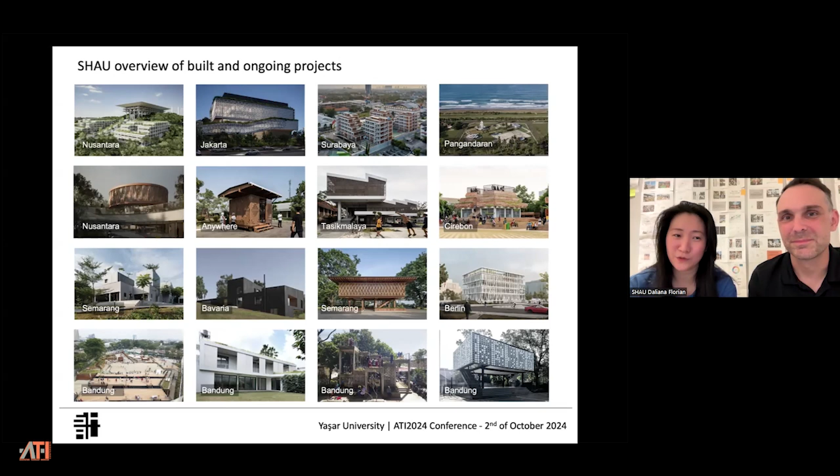This is an overview of our projects. So we do not specify ourselves in a certain typology or a certain program, but we are very wide range, from very small scale libraries to very big master plan projects, including a vice presidential palace at Nusantara, the new capital. So the project range is quite wide, and we are fortunate to have been recognized within certain global as well as regional awards, where we try to see where we are in our design at the moment.

So when we're introducing ourselves, we used to use a normal world map with a Mercator projection. But at a certain moment, we realized it's not representing our world and the world we're operating in very well, because it's very much focused on the global north. So we switched over to the Dymaxion world map by Buckminster Fuller. It's based on an icosahedron. And what we like about it is it projects the continents in different parts of the world more equally, as they are in relationship to each other in size.

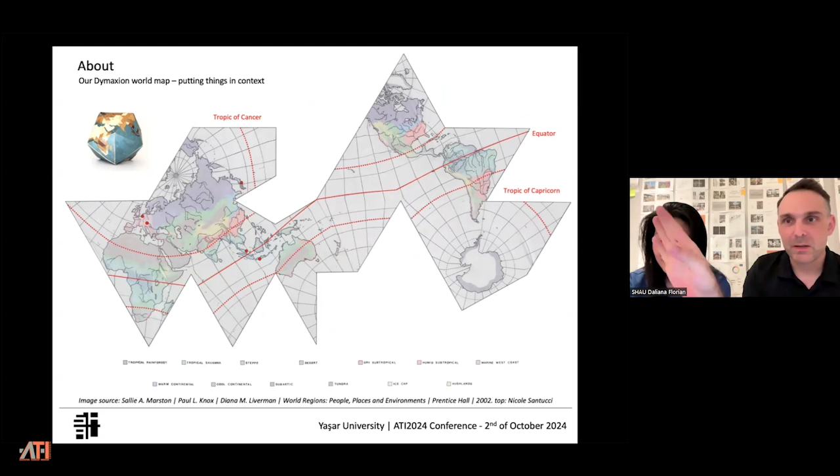But by cutting this open and unfolding it, you can create your own context, and that's exactly what we did here. So our anchor is Indonesia and Singapore. So we made a little bit more of an Asian-centric unfolding. We put the Americas far away because we're not operating there; they're not so important for us. And at the same time, we put a climatic map as a background.

Because also this unfolding where you see the equator as something continuous, this is something that we can learn from around the world. Coming into Indonesia, especially for me, maybe not so much for Daliana, was also a process of unlearning and relearning, especially with this semi-formal context. From Europe, you do your contracts, you do your drawings, you send in your BIM model, everything should be clear, ideally speaking. But in an Indonesian context, it's much more informal. It's much more of a negotiation process. A plan is not necessarily something set in stone, but something which you also need to negotiate and need to be flexible during the construction process.

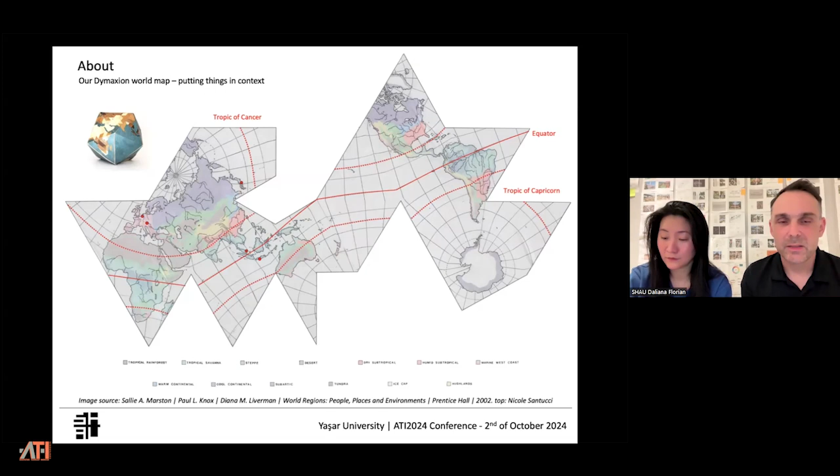So in that sense, if we look at the equatorial regions, I think we as architects can learn a lot from other tropical climates and solutions and implement that in Indonesia. So we want to look at architecture a little bit from a different side, not necessarily from a global north perspective. And this is what is expressed by this map.

And the interesting part is that in comparison to the global north, you have a much more narrow spectrum of temperature. So you don't have to deal with cold winters, and you don't have to deal with hot summers. You don't have to deal with these extremes, which means you can generate relatively open buildings that don't need to be that airtight in order to be comfortable.

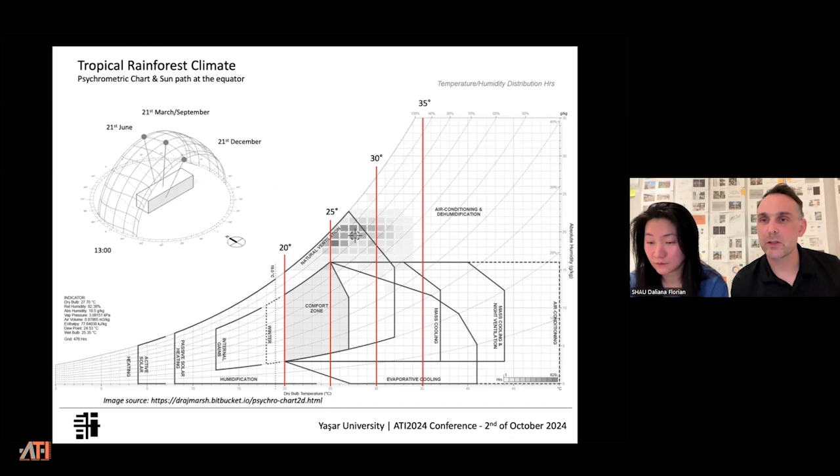So this heavily influences, of course, the building geometry and orientation in the layout. So you strive for relatively slender volumes where you can have a lot of cross ventilation, with the long facades towards north and south for easy shading.

Now, looking into energy consumption per capita, the United States is by far the most consuming country, but India, Indonesia, Brazil, and other countries which grow economically will also have a huge energy demand. So our idea is that we do not deny anyone air conditioning, but we try to get into a position where building envelope performance can curb these peaks, or in general contribute to a lower demand for operational energy. And this is what all our architecture is trying to do.

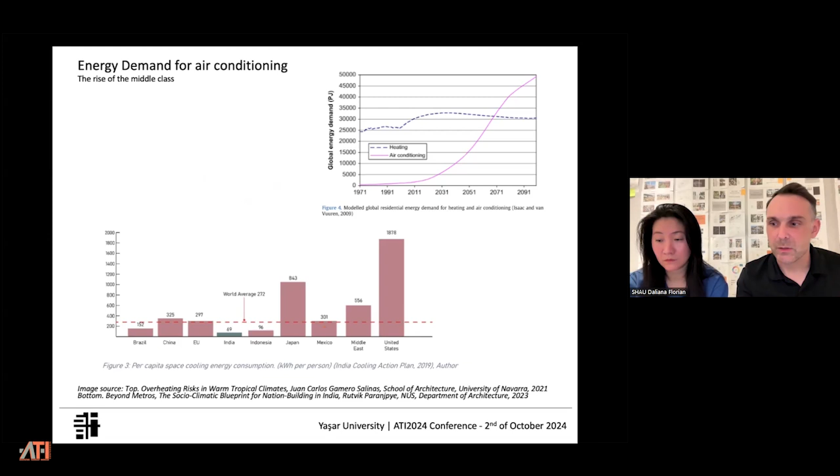And in opposition to, let's say, a hot, arid desert climate, you don't want to work with thermal mass, because with the clouds throughout the night and the day, there's very little opportunity to discharge thermal mass and radiate it into the night sky. There's also not much temperature difference between night and day. You have like 30 degrees all year. So a breathable, permeable architecture in terms of cross ventilation and breeze is what you actually find in most of these regions.

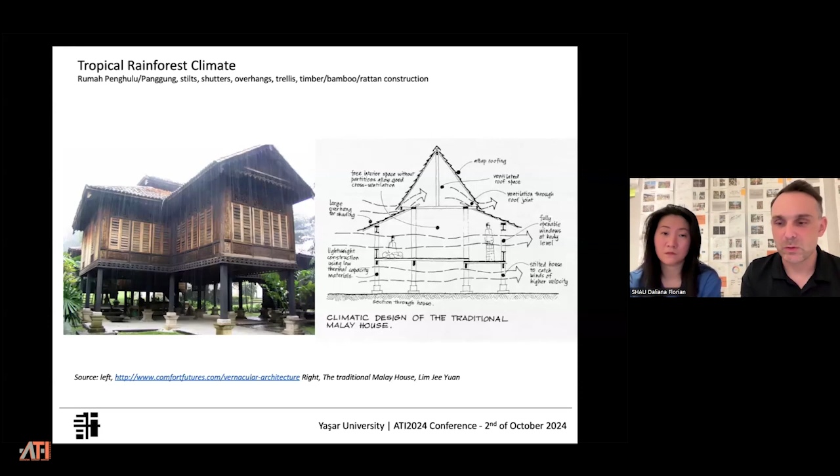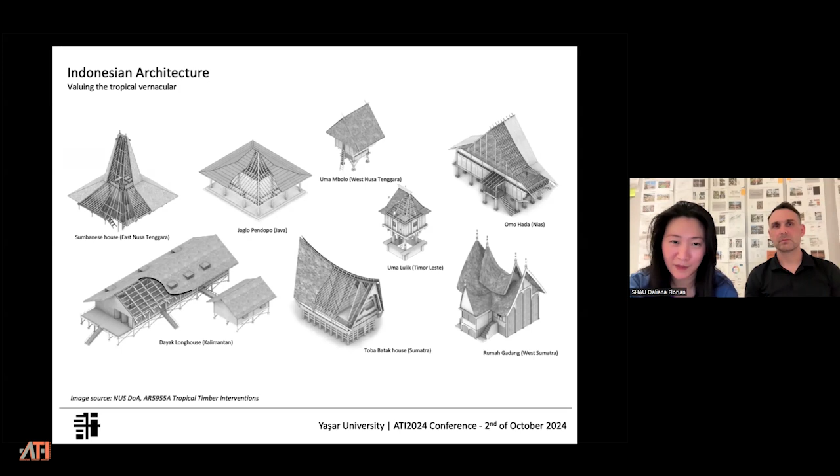So these are drawings made by the students of Florian at the NUS, and we take a lot of reference from the traditional architecture because it has been there for so many hundreds of years, and it is considered very valuable to see what has been done natively by the people.

But as well as it creates socio-climatic spaces, which is where culture and programmatic uses are embedded into the architecture in such a way that they are not separable from each other. And it is important, we think, to see architecture in that way, that it is never separated from the people, from the users, from the culture.

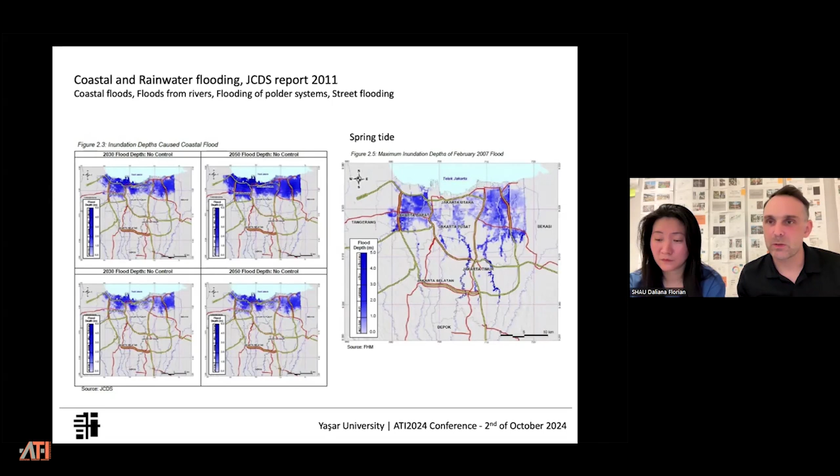So one does not know where to start and where to end, which also led to a decision by the Indonesian government under Jokowi. There were plans over several years to move out the capital, and now they're finally making it happen.

So there will be a new capital in Kalimantan. That's how it's called in Indonesian. Internationally, people maybe also know it as Borneo. It's an island slightly northeast of Java. So the idea behind it is to relocate the capital into a sort of more disaster-secure zone, so there are very few earthquakes. And of course, bringing the capital more central into the country, so that other, let's say, more disconnected parts of Indonesia have sort of equal access.

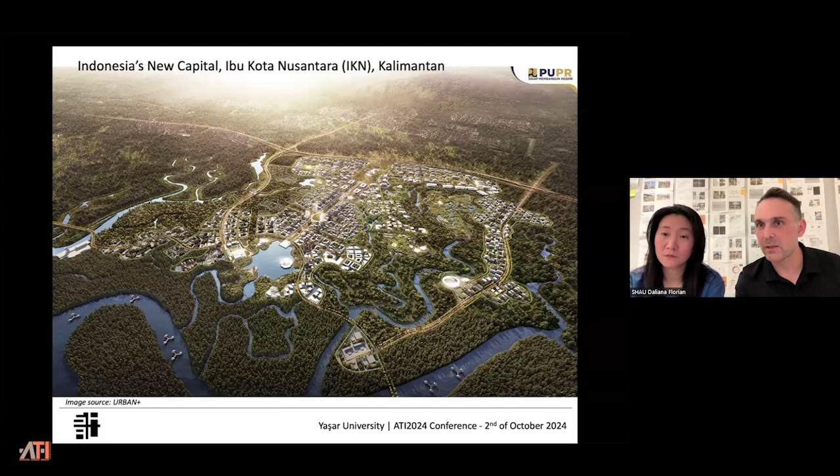We will also talk a little bit about the project there, but this is sort of, very in a nutshell, what Indonesia is about, architecturally speaking, from our point of view. And with that, Daliana will now explain projects from us.

Let me take you from the last slide of Florian, the new capital, to Bandung. So Bandung is the place where we grew as an office and where a lot of our earlier projects are taking place, including this very first micro-library in Bandung. It's called Micro-Library Bima. So we have support from the city of Bandung, as well as the Muslim foundation called Pocket for the Poor. And it is situated on a 500-square-meter plaza where there is an existing stage, and we elevate the volume, clad it with 2,000 ice cream buckets to allow the multi-programmatic activities underneath in the outdoor space.

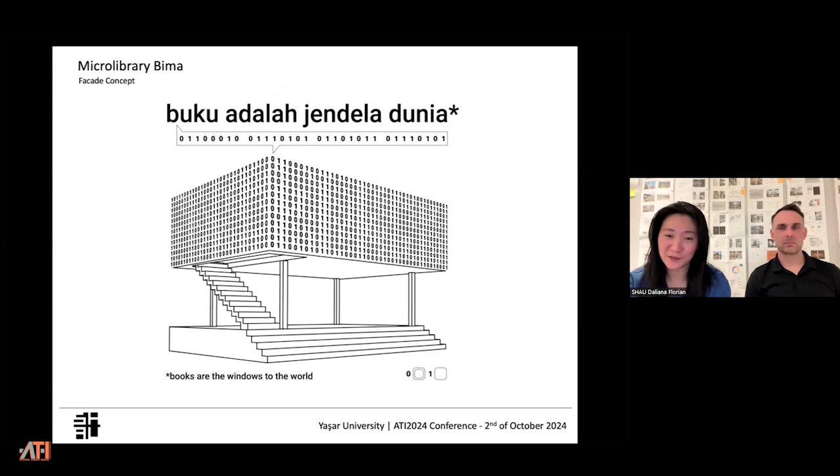So in a way, this is already a semi-informal project engaging different stakeholders, such as public authorities, but also foundations, as well as the communities. So for each of the buckets, one is closed, one is open, and we made some coding, 0 and 1. And with this binary code, if you read it out loud, it's a repeating sentence that says books are the windows to the world, which happens to be the message from the mayor of Bandung, who is also an architect, by the way. So this is a very interesting way to put a message on a facade which looks random, but actually it's not.

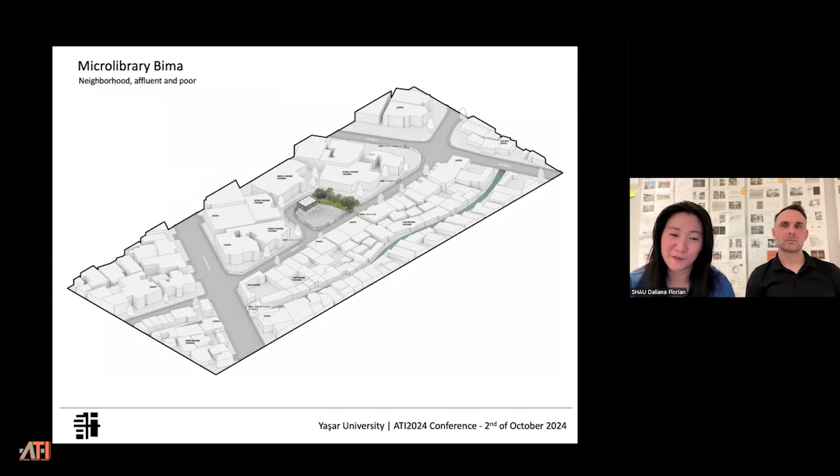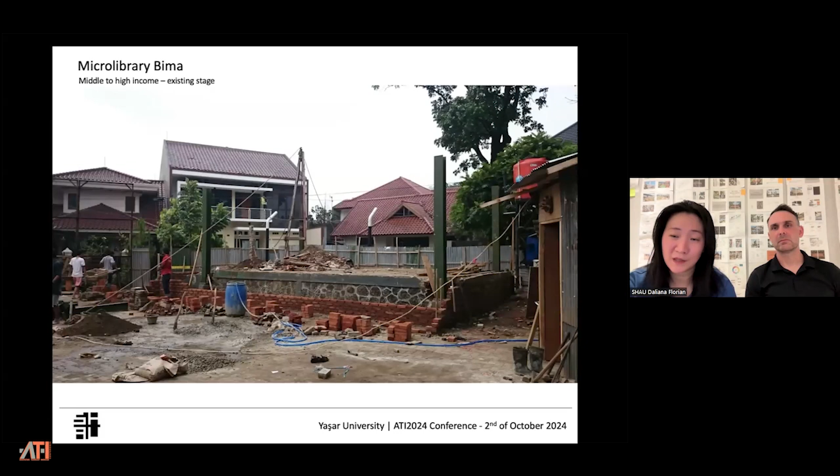The context is very interesting as well. The plaza is surrounded by several middle-class housing, but mostly lower income housing, which is built along the river. So it looks like this. The river is seen as the backside of the house, and these are where our users are from, the lower income kids. There was an existing stage, and we decided, instead of taking away the stage which they're already using, keeping the stage, extend it, and then put a volume on top of it.

And we were considering a lot of different materials for the facade in the beginning. So we were searching around what kind of secondhand material is available. And in the beginning, we found jerry cans. So these are like plastic jerry cans where you put water or oil to sell it to the people. But at that moment, we could not have enough used jerry cans, and we were offered that they would produce new plastic jerry cans for us. So we said no, because that's defying the purpose of using reused materials.

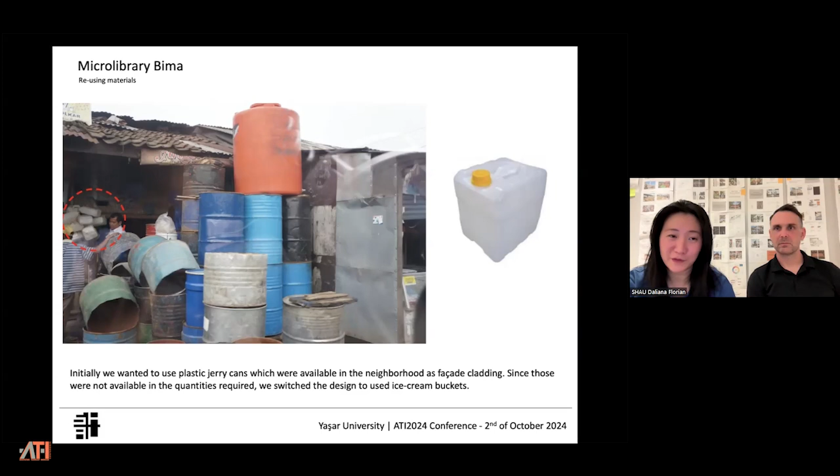And so luckily, after searching hard over and over again, we found another material which is even better in this regard due to its size and availability: the ice cream buckets. So there are many weddings in Indonesia, and every time there is a wedding, there is ice cream. And this is exactly the ice cream buckets used in the weddings, and every wedding uses 5 or 6 buckets. And then over time, there is a secondhand market that collects them. And all we had to do was to contact many of these online sellers. And then after 2 months, we managed to collect 2,000 ice cream buckets.

So we clean them, we punch holes in some of them. And it is also interesting because we are in Indonesia, where everything is done manually. So even though we have a clean file, we cannot just send the file to the printing machine and then it will be done by robots, which we would have done if we were, say, in Switzerland. But in Indonesia, there is a lot of manual labor, and even the tool for punching the holes for the screws is also made manually. So this is where, say, the file to craft happens. And we value this process very much.

How do we, as architects, have to communicate and be creative about how to go from our 3D file to the implementation on site? So this is some photo of the assembly. It's a structural frame. And then this is where part of the ice cream buckets are being installed.

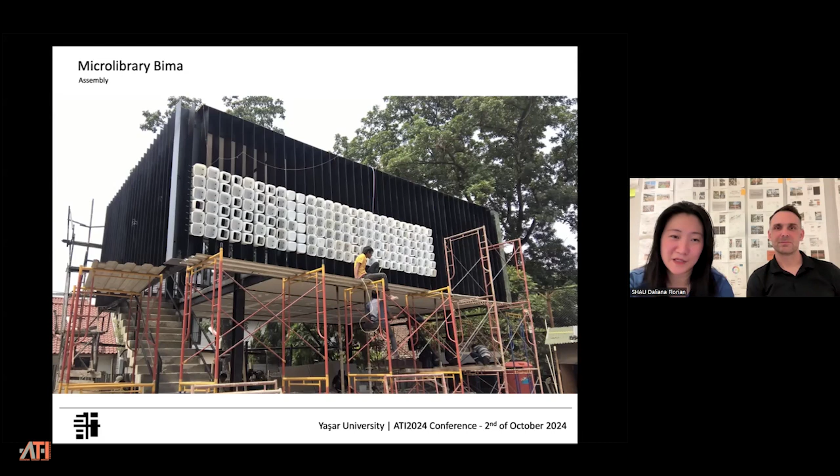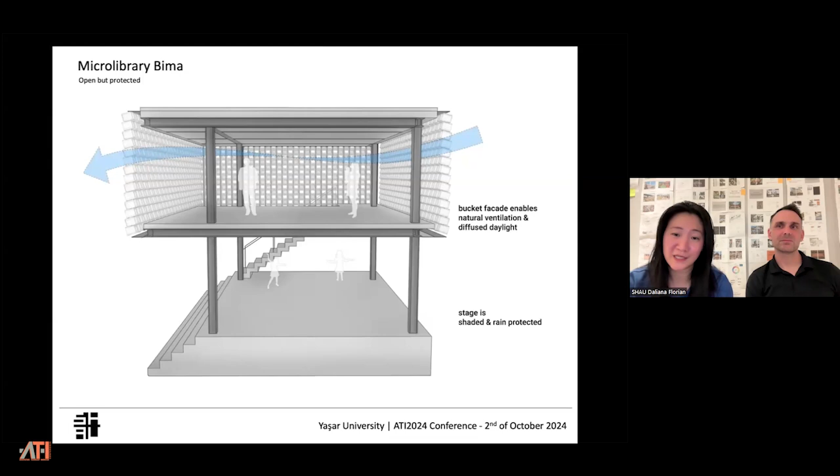So for us, engaging the stakeholder, making a mechanism, if you like, how to deal with the communications, the negotiations, so that things can work in place. So the communication design is also important, not only the architecture design.

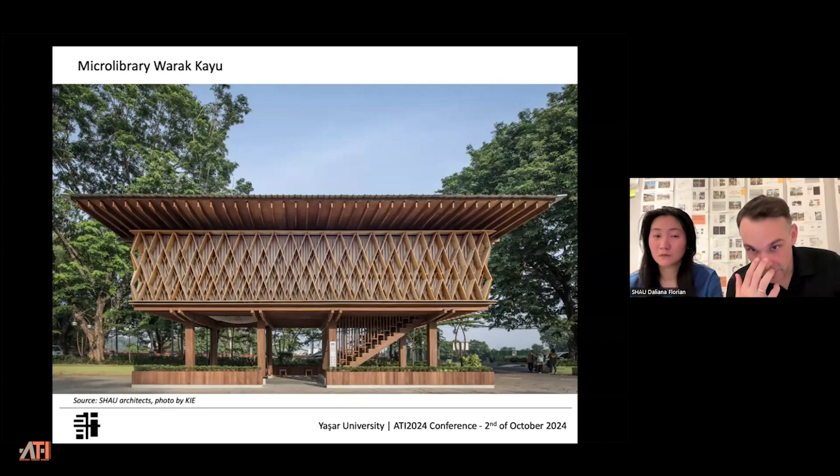It's also made entirely out of timber, mass engineered timber in the form of finger joint laminate and plywood. And it's the first completely FSC, Forest Stewardship Council certified building in Indonesia itself. So the timber is logged in Kalimantan and then shipped to Semarang, but they have a reforestation program and so on to grow new forests out of the logging they harvest.

It is situated next to a major road and a food court. So it doesn't need any toilet because the food court has a toilet. It doesn't need anything else because people can grab food there. And the difference to the previous library, Bima, is that it is more at a traffic artery. So it is serving a wider audience, or has a wider catchment area than the previous one, which is only for a very small neighborhood.

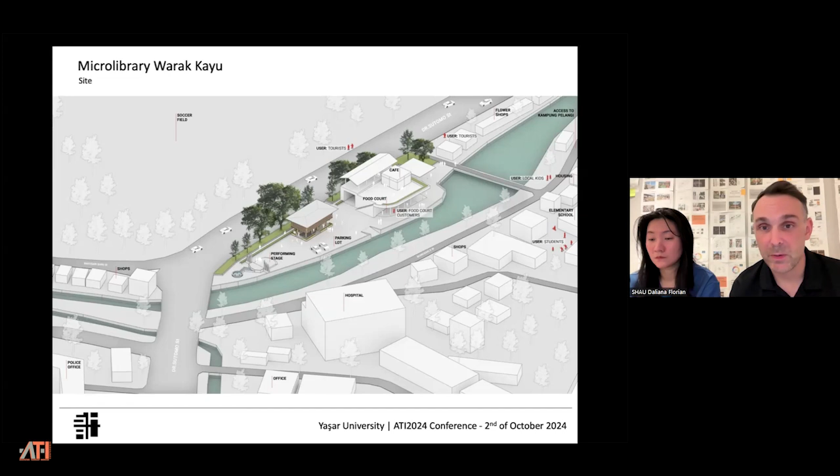Here you see a little bit towards the Kampung Pelangi. So Kampung again, the village, and Pelangi means rainbow. You see this signage up there on the hill. So there's a lot of upcoming middle class people working and living there. There's a school nearby. So it's quite an interesting setting to get people attracted towards reading and bring them into a library.

Because it would be actually quite interesting, instead of having a material mix of concrete, steel with wood or whatever, could we make this library entirely from timber? So we visited the factory and had a look into their capabilities in terms of manufacturing, as well as material availability and material strength. And from that, we started a bottom-up design process. In that sense, what can we do?

And part of that, again, in terms of climatic performance, is the envelope, the brise soleil, which in a way, together with the roof, shades the interior and reflects the light diffusely on the inside. And we found this also quite interesting because we based this on a construction method which is called the Zollinger

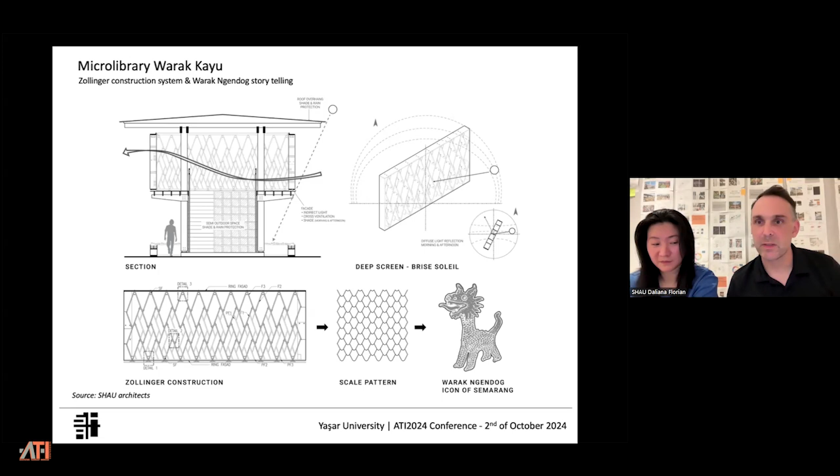But instead of designing it from that side towards an expression of the building, it is really an outcome of the design process, and then coming up with this idea also as a communication device. Because what is very important in this formal, semi-informal context in Indonesia is how you communicate a project so that people can accept it and will like it. With the ice cream bucket, it was relatively easy because everybody loves ice cream buckets. But with this one, we made a story work for us, for our sake as well.

Part of this construction is then the building of this one-to-one mock-up. And this was super instrumental and very important, because only sending files and drawings there is not enough. It was also a great chance for the workers at the factory to learn something. So we could go back and forth. We could test out details. We had a very interesting ping-ponging design process with their engineering team. We could look at, does this detail work? Does the material quality work? And so on and so forth.

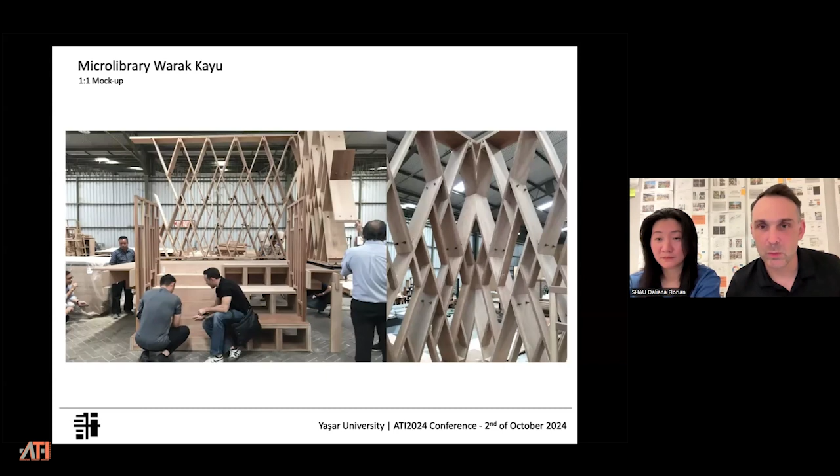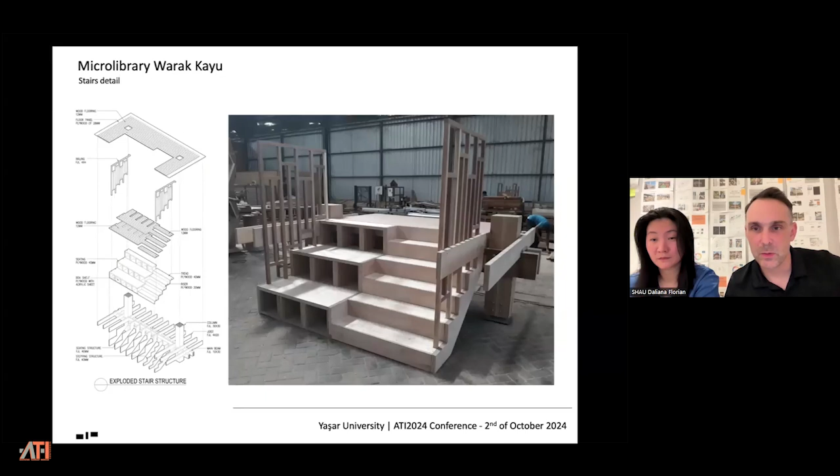So the workers in the factory used it for their training. But later on, the contractor, who had never assembled something in timber, could also come and look into this one-to-one model and check out how these details are working. And here you see how this mock-up, which you saw previously in its entirety, was built up. We wanted to test the stair with the seating stairs. How does the flooring connect? How does this handrail, or this trellis, which is lockable later, connect? So checking all these details.

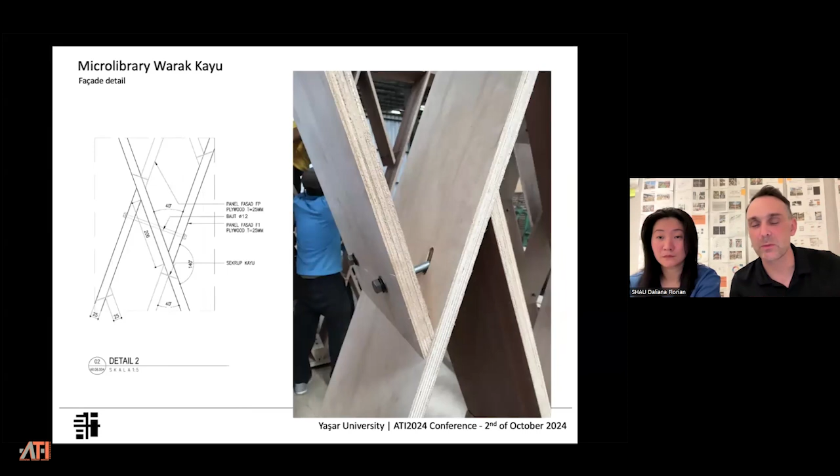Then here you see a zoom-in of this Zollinger construction. This one board is cut at an angle so that it perfectly hits the required angle so the bolts can go through perpendicular. How does it work with the round holes and the long holes in the middle, as well as this corner detail, which was very intricate. We have two different corner details on each opposing side, and how that can work and be manufactured.

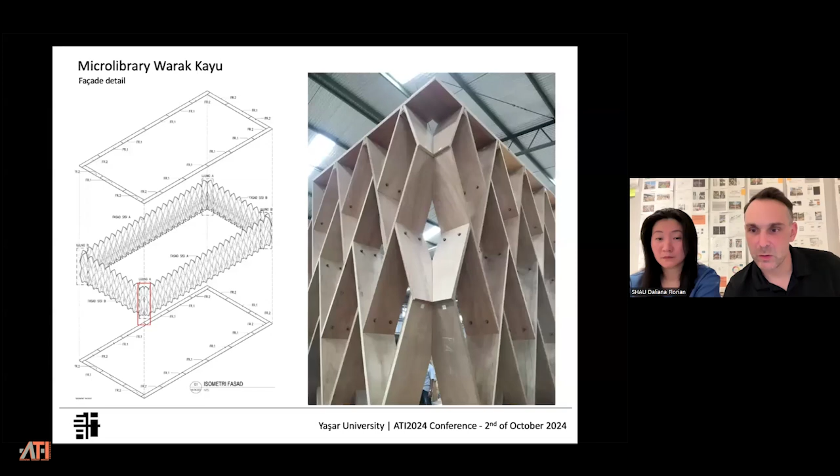And then finally, you see here again the detail of the facade, how it comes together on the floorboard. Basically, it's working with a wedge which is pressing these boards apart, and they're sitting in a groove. And since they're sitting in a groove, they cannot move. So it's like a friction joint in that sense. So this was a very interesting design and communication process to do something which had never been done before, even though at a small scale.

And as Daliana also mentioned earlier, in this process communication is the issue. So working with one-to-one mock-ups and directly with the material is crucial, because sometimes this high level of abstraction from only a 3D file or an elevation is not giving the best results in terms of architectural outcome.

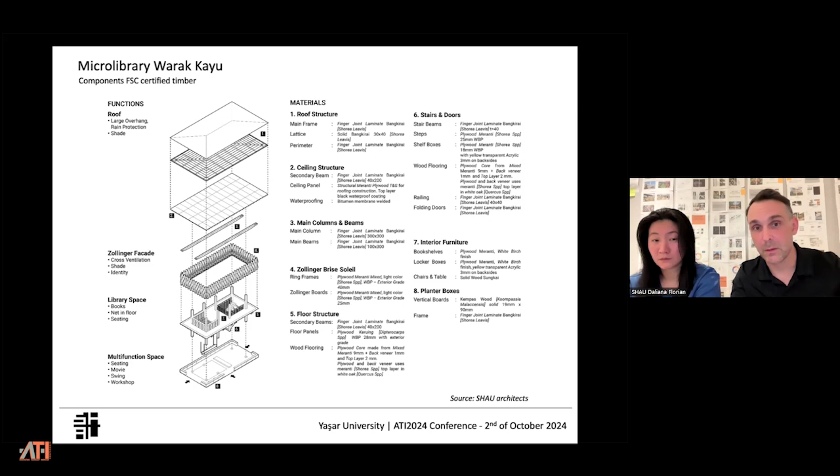But also in implementation of play features. So what we learned from this Bima and the earliest microlibrary is, in order to attract kids, and this is of course the most important target group, is to bring them there. And in microlibrary Bima, kids from the neighborhood were always playing football, so they were there, right? So we didn't want to place the library on the ground, because we would take away the reason why people were there in the first place. But here, something like that was not existing.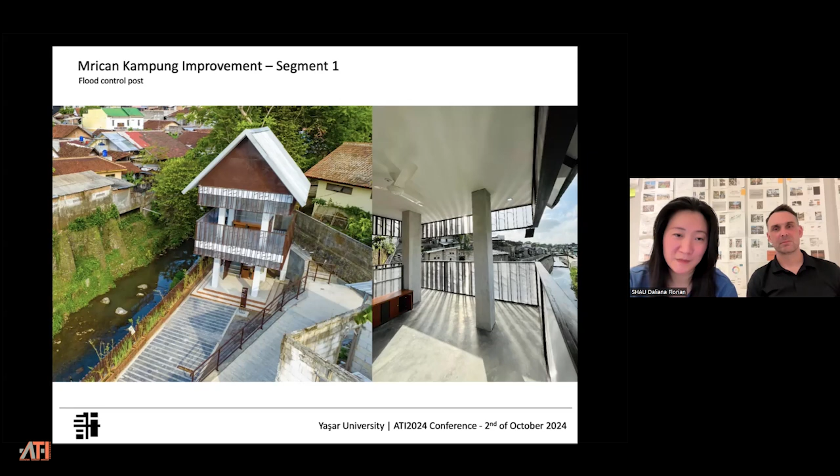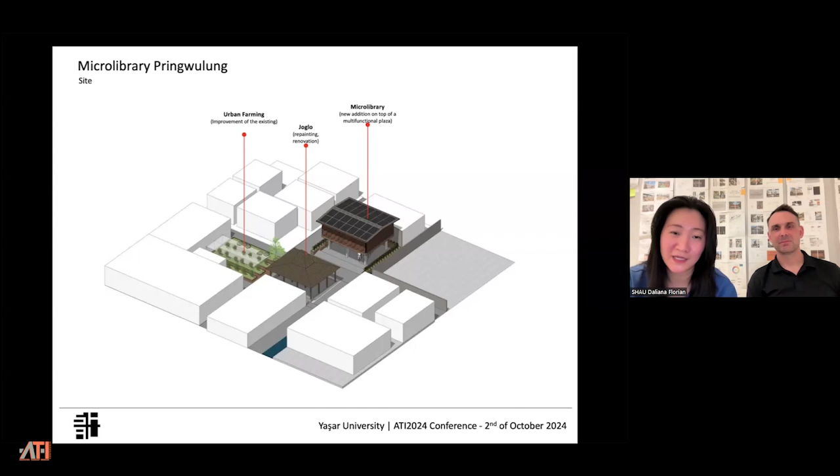It also includes a flood control post where you can see how high the water is in the river from a distance, as well as urban farming, which has its own community of older ladies, younger ladies, farming and planting some edible garden. So the site for the new microlibrary, which we added to add a literacy program, edutainment, if you like, they call it, into this neighborhood because of its proximity to nearby universities. So it is important, we think, that the children in this neighborhood are also given an advantage, that they are given a reading facility and a place for learning.

So we carried on with the strategy of house on stilts, but also to acknowledge that there has been a programmatic use on the ground since the beginning. So it has always been used for weddings because of its proximity to their gathering space at the opposite side, but also for motorbike parking when they need to, and for any other uses that they need. So the reading space is on top again, and we use again the same climatic facade, which is a brise-soleil, a secondary skin, this time made of clay.

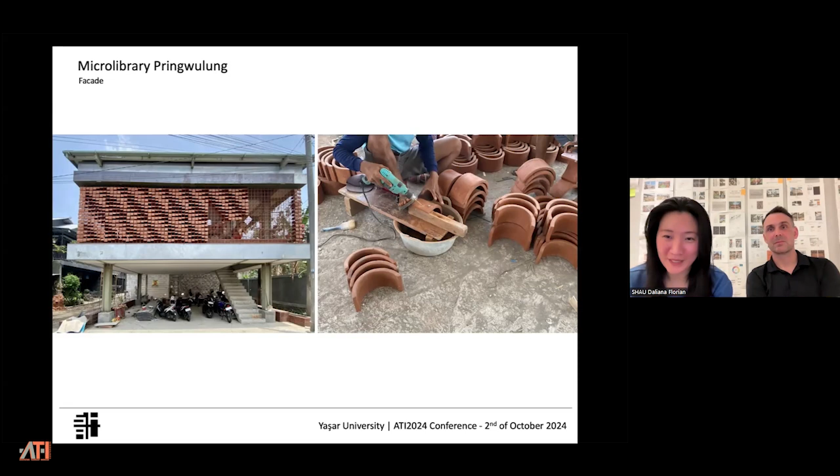So we want to do something that looks a bit parametric, if you like, but done completely manually by hand, and only uses an iteration of 5 rotation variations for each of these clay pieces. So it is the same clay shell, but on the metal bar, it's rotated in 5 variations.

And we know that we might not get a good contractor for this project because it's tendered publicly. And it is usually not the best contractors out there when it comes to public tendering. So we were ready that it has to be explained in the simplest way. The detail has to be as simple as possible. And still we got this mock-up back and forth to our office in Bandung until we could settle how the clay is secured on the metal bar and how it's rotated nicely.

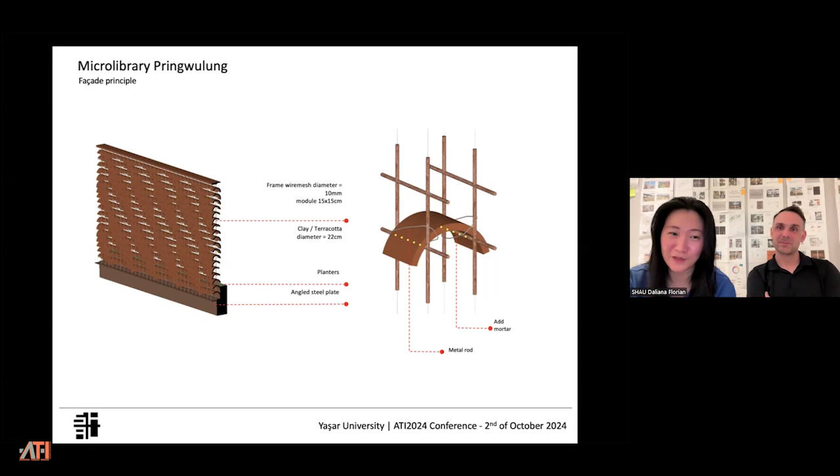Enough light. And it's already used by the local residents for many things, for reading, for praying, for different activities on a daily basis.

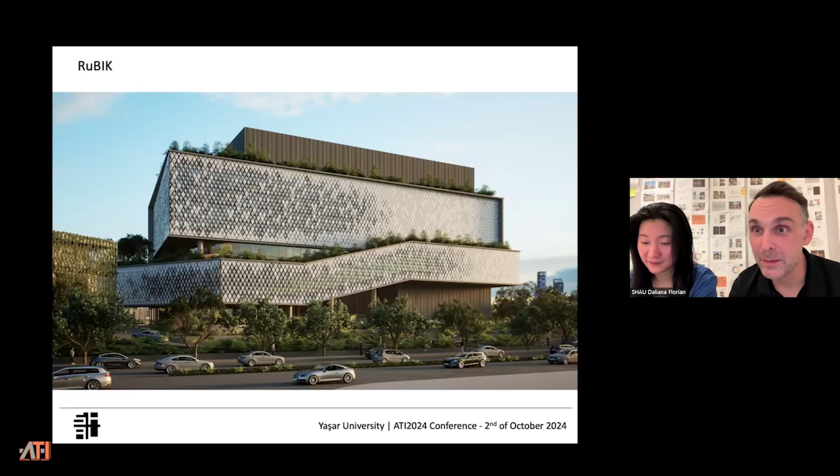Good. So we have 2 more projects, these more detailed. And so Rumah Budaya Indonesia Kaya, shortly Rubik. This is a multi-purpose theater in Jakarta. And this is one of our bigger projects right now. We will have the groundbreaking actually next week. So we run you through this one. And this is in a way an accumulation of what we have learned so far, just on a bigger scale and a little bit more, let's say, high-tech and with a bit more budget.

So the basic concept for this building in this Permata Hijau neighborhood, which you see from the form, is very small scale, very few big buildings. So there comes this very big building, but it will also generate some form of workplace and positive economic impact for the people around, and also educational elements since it contains a music school. So the basic concept is around the massing of these different functions and programs. So we have the multi-purpose theater, we have the black box, and we have the dance studio.

And what usually happens a lot in Indonesia and Jakarta, and maybe to a certain degree also in Turkey, I'm not sure, you tell me later maybe, but buildings are always very closed. Closed in terms of climate, to shut it off, but security is also a very big issue. And Indonesia, especially Jakarta, has a lot of shopping malls. And shopping malls use the landscape as a sort of divider between the road and people on foot, and people can only enter if they have a car.

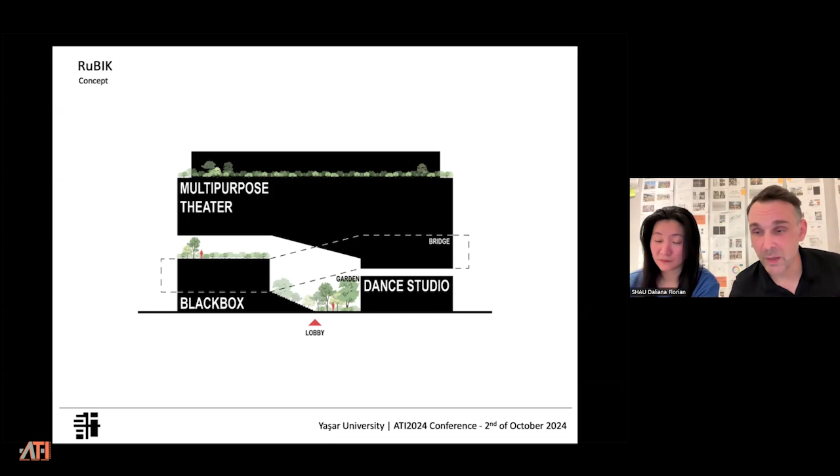So actually, the idea of this building is to create sort of a big gate, to be as open as possible. It's not 100% possible as we imagined, and I will show you in a second, but it keeps the option open for the future that it is a very, very open building. So basically you go into this semi-outdoor lobby, and then you can go from there into the dance studio, into the black box theater, and into the multi-purpose theater.

So the concept is structured around 3 different elements. One is the landscape and the terraces, which are integrated into this building and of course into the surrounding landscape. But similar to a sawah, also what I showed in the earlier presentation, this man-made landscape has some form of performance aspect. And of course, with agricultural production, it is there for planting rice, but it's also a water management system.

And as Jakarta is constantly flooded as well as sinking, integrating a green roof enables us, at least on a local level, to reduce the rainwater and stormwater impact on the sewage system and the flooding. At the same time, when this water is evaporating, it starts cooling the building, and we will use this water as a form of storage in a cistern and in a pond, then for flushing the toilets.

The second aspect is this cave and this hidden garden. So this is maybe less of a performance aspect, but this gate, this entrance situation, creating an almost mysterious place which draws people in, is part of this design. And finally, in the form of the cladding, the Pucuk Rebung facade, where you see these diamond-shaped patterns, is what we call a cultural climatic envelope.

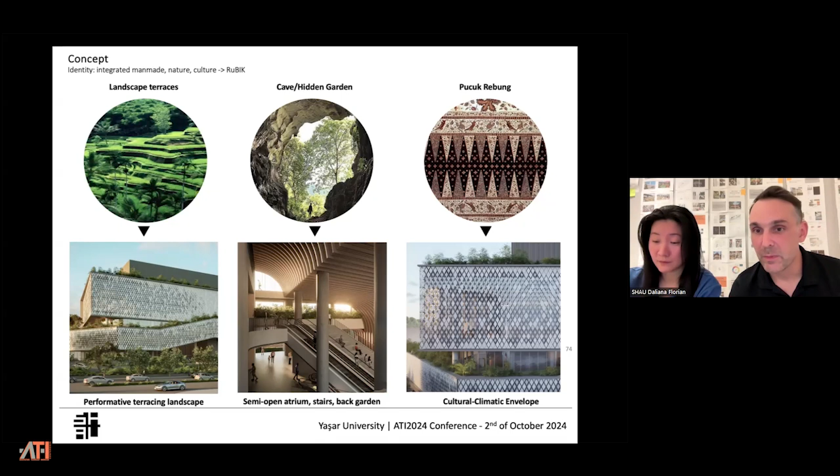So because it's a very big building with a lot of people coming in, a 1,200-seat theater, they want to have the view. It has to be representative, but how can you then protect the building from overheating due to the solar heat gains coming during the day?

We designed it in such a way that air can blow through. But then also with this idea, if the situation is improving at a certain moment so that it is more secure, then you can take this completely away and it becomes a completely open building.

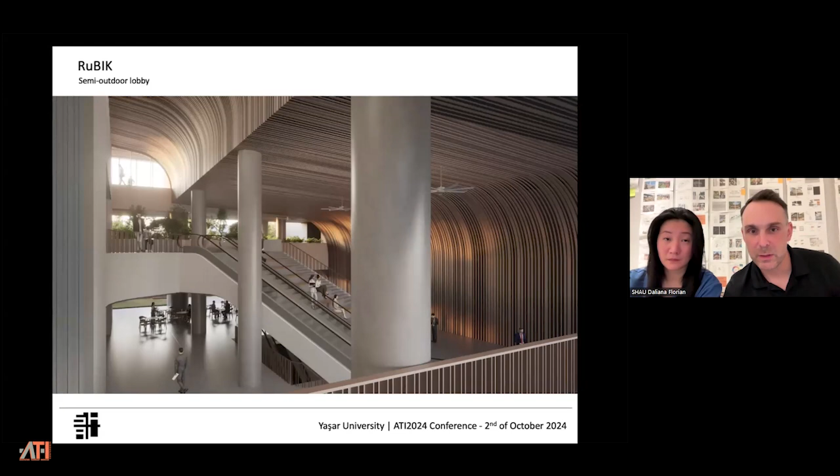So if you walk through, you have this lift, then you can go on the right side into the dance studio. On the left side, you go into the multi-purpose theater. And if you just walk through, you will enter this sort of hidden garden landscape element. And continuing up, you have this stair, which can then also be used as reading space instead of just walking up. A small library can be integrated here.

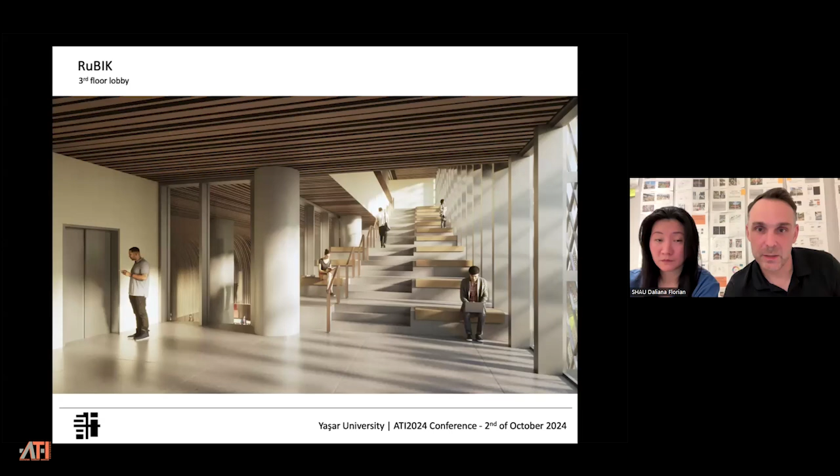And finally, you arrive on the top floor, where you have this great view over the city behind the Pucuk Rebung facade, and from there you can enter the main hall on different levels.

Oh, there's a cat. Different levels.

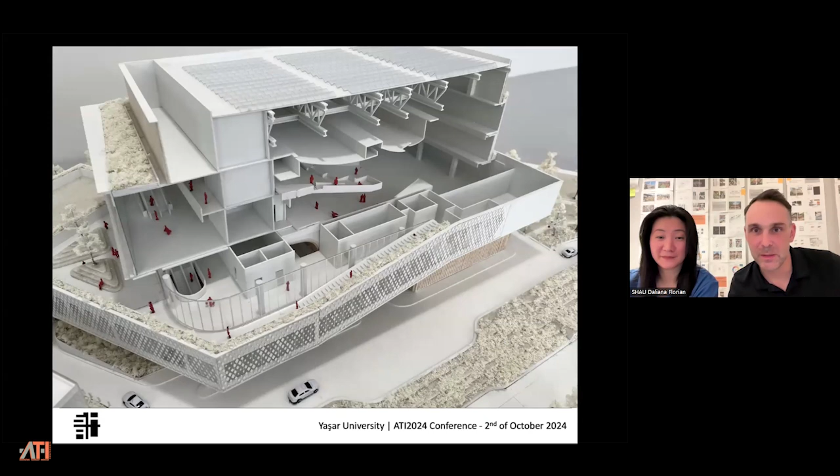Of the building itself. So this is a sectional model where you can lift away the front part, and you see a little bit how you can traverse through this building into this main hall. And again, we use this motif of the Pucuk also in conjunction with these acoustic panels on the side and on the ceiling. And we wanted to give it a more grounded, heavy appearance and solidness in the form of local andesite stone.

So again, here we are working together with Nagata from Japan, the acoustic advisor. Shimizu is the contractor. So there's a lot of back and forth between materiality, geometry, and the microstructure you need for good acoustic performance. And again, it needs to be locally produced, so cost and appearance need to be closely monitored. And I will show in a second how we do this in practice.

That's the view towards the theater itself. It's a multi-purpose theater. This is now the closed version, where acoustic panels are hung from the fly tower in the back. It can also be opened for other performances as well.

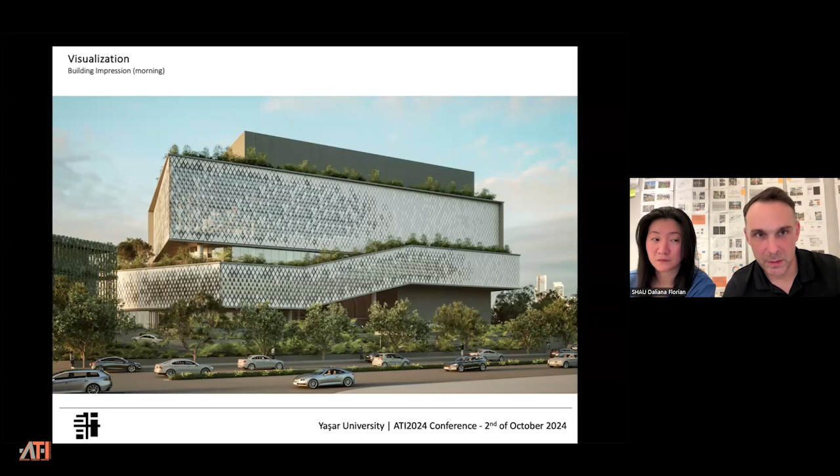Coming now to the facade a little bit more in detail, to the building envelope. So as explained earlier, it's a Pucuk pattern. This is actually also a batik pattern, but it's not only local to Jakarta; it can be found throughout many places in Indonesia. And it's basically this idea of bamboo sprouts. You see that in the black and white drawing.

And so one of the design aspects is how many of these panels we need to shade, and how many we need so that we can still look outside. But then again, through our experience working with other building envelopes, we realized, and Daliana has already explained it, that 5 different elements is actually enough to make a gradual change without people realizing that these are 5 distinct elements. With this, we have a very limited amount which can be handled and manufactured.

So it's actually completely the opposite idea from maybe 20 years ago. Mauricio maybe remembers Hyperbody, where you could say file to factory and produce and manufacture everything. So what we try to do is introduce similar ideas, but with the added notion of performance and energy reduction, while being manageable and constructible in a context like Indonesia.

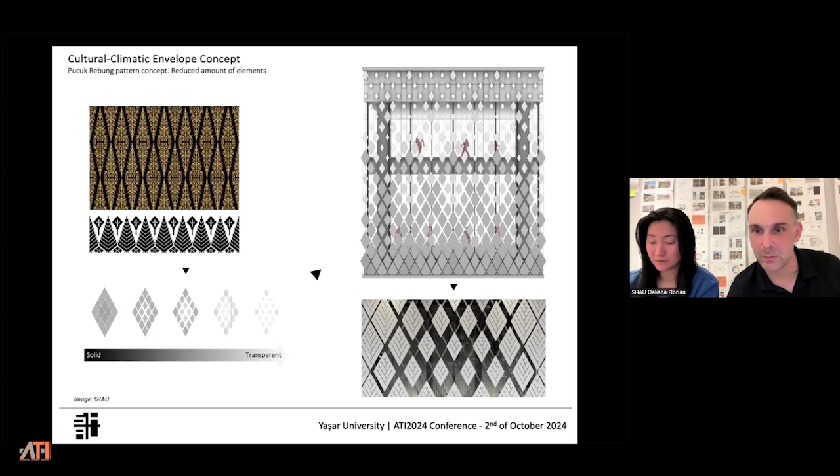So like I said, part of this design exercise was mapping out where the best view is. We have denser panels where people are just walking, where it is not ideal in terms of orientation. And towards the east, where we have the east view, we have fewer facade panels, because we don't need that much thermal protection, since the plays are happening during the evening.

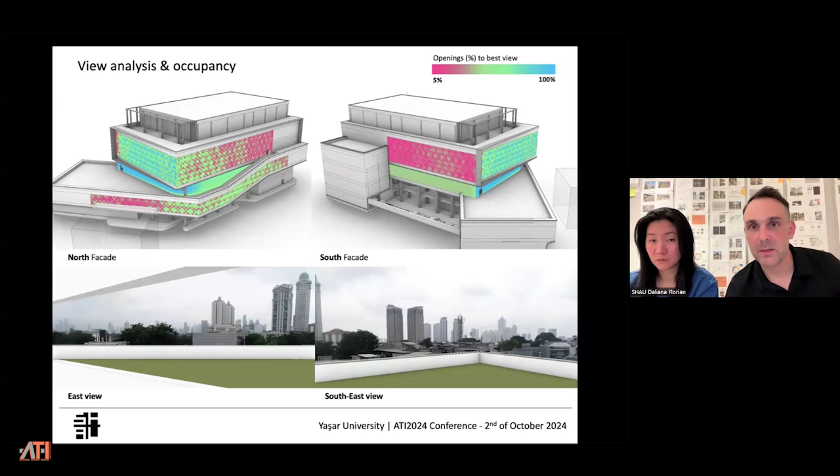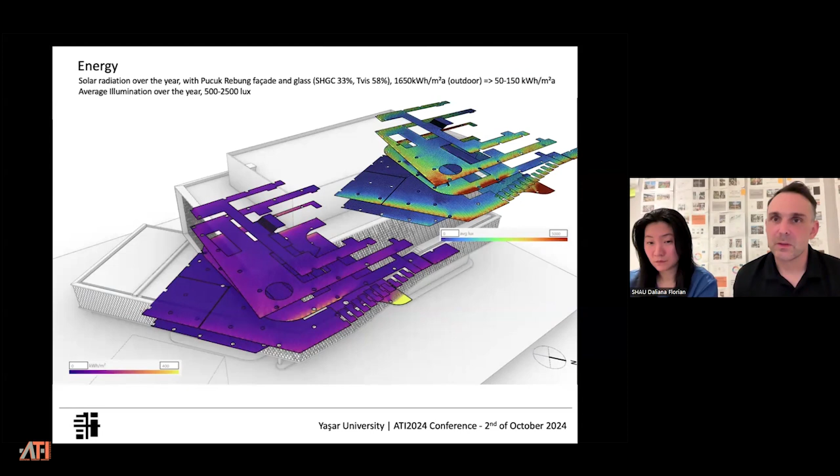So when people are occupying this space, then the sun is on the other side, and they're relatively well protected. We did some studies. So the combination of the glazing materials, which has a relatively good solar heat gain coefficient, or not letting a lot of heat into the building, with accordingly 58% visual light transmittance, that in combination with the facade reduces the solar heat gain roughly by 10.

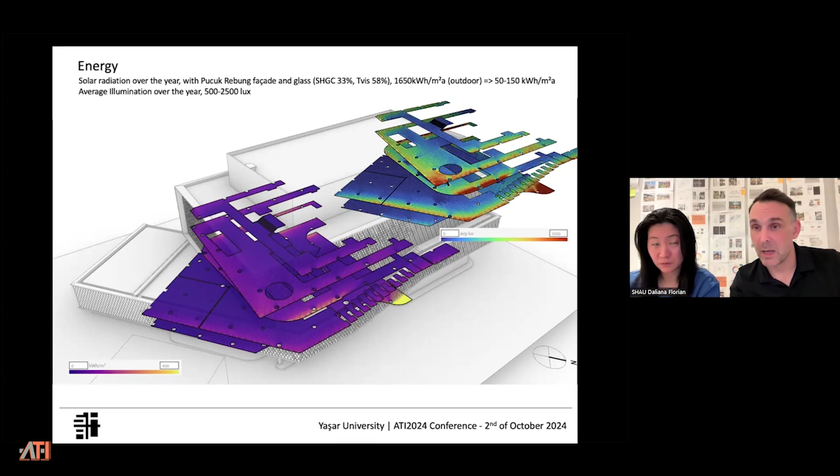Meaning if you have a horizontal surface, you have roughly 1,650 kilowatt hours per square meter per year. And the facade, depending on the position, the deeper you are in this space, of course, the less, but you have between 50 and 150 kilowatt hours. At the same time, we were cross-checking that a little bit with the illuminance, that there's still enough daylight coming in that it can be used without electric light. Resulting in this facade here as the elevation.

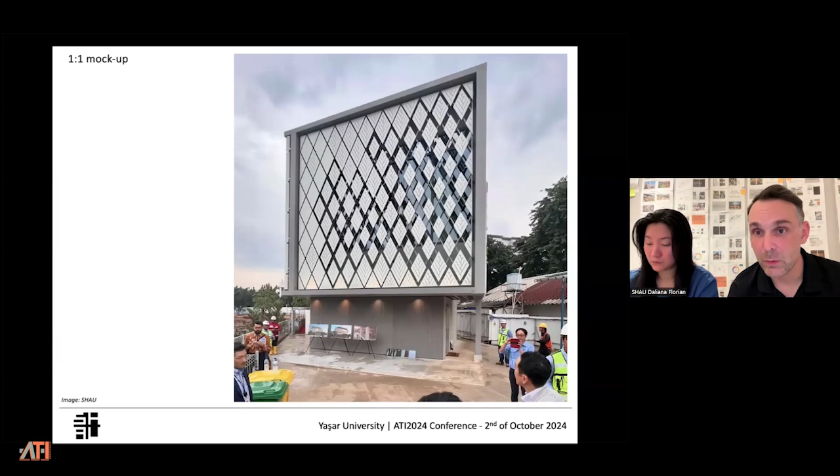So these sorts of mock-ups, of course, you need a client paying for that, but they're really important in order to have the same baseline of communication, because, again, not everybody can, even if you make a rendering, imagine how this looks in reality.

And coming here to the facade, if you have a look, the panels are not mounted directly onto the diagrid. They are with a distance. We insisted on having a spacer of at least 5 centimeters, because with that, a certain amount of light is able to shine behind, and the backside of this panel is not entirely dark. And with this, we also enhance visual comfort. We have less glare in terms of contrast between dark panels and a bright outside. And in the same way, the holes are also contributing to that, and at the same time, having this Pucuk pattern.

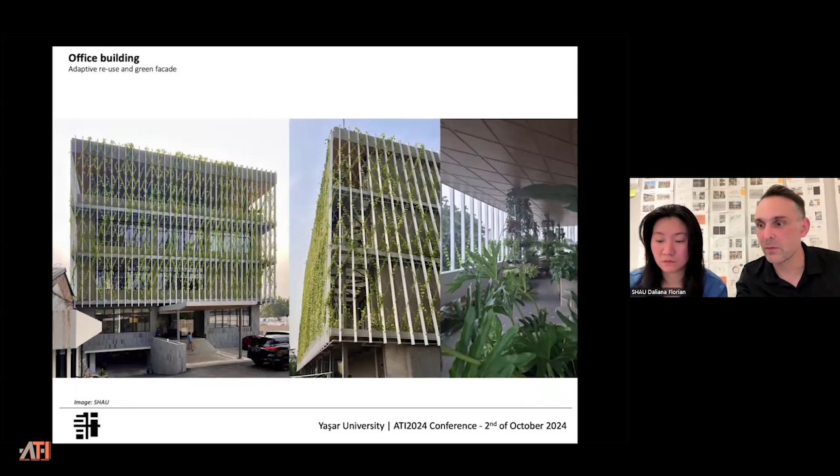So it is also another interpretation of this Pucuk pattern in the form of a cable diagrid where plants can grow and also provide a nice view to the outside in the form of green, but also blocking parts of the light and reducing the heat gain. And with this, I hand over again to Daliana, and we have another short outlook. And then I think we're almost done.

Yeah, we're at the end of our presentation, bringing you to Nusantara, where we won this project in 2022, the Vice Presidential Palace, among other projects for which we also joined the competition. And the groundbreaking was in August. So it is in a way under construction, with revisions in the working drawings.

So this is the Vice Presidential Palace design. It is on a 14.8 hectare site. It is a hilly site. So we placed the office and the palace on the top of the hill, and all the other buildings are terracing down. So it's hidden with a green roof. As it is also the idea of the forest city that a lot of buildings are hidden behind the trees, but only the iconic buildings are standing out.

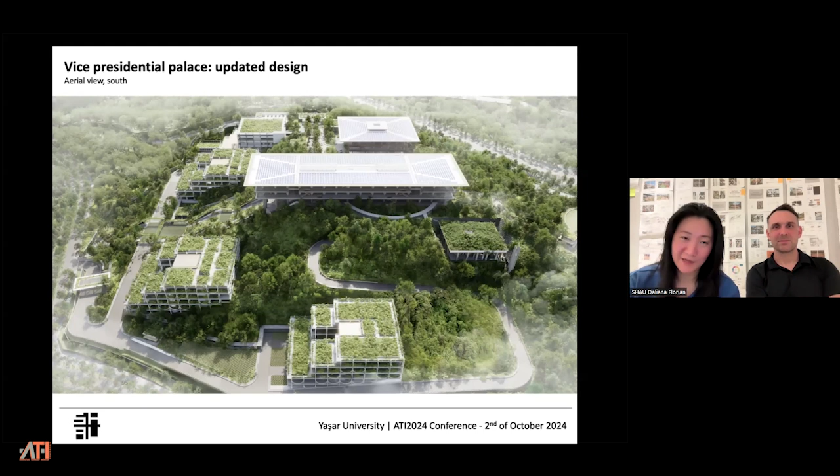And in this case, we would like the palace and the office in one building to stand out and be covered completely with solar panels so that it is sustaining its own energy by itself. And the orientation of the building is also according to the sun angle, with the least surface area on the east and west. So now we're trying to work very hard with the MEP engineers and all the green building engineers so that we can achieve what we intended in the concept design.

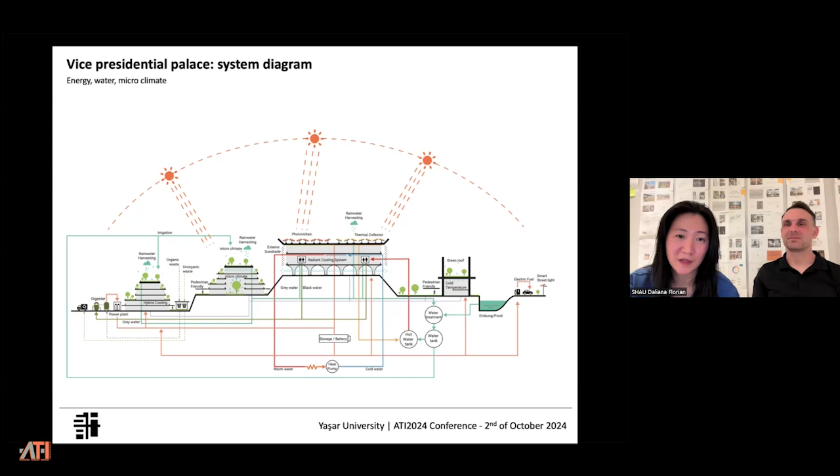So not only the solar energy, but also the hybrid cooling system, the rainwater harvesting that needs to work in one integrated master plan so that we can achieve the intention that we want with all these aspects. So it's in progress, and that's about it. We can preview regarding the Vice Presidential Palace.